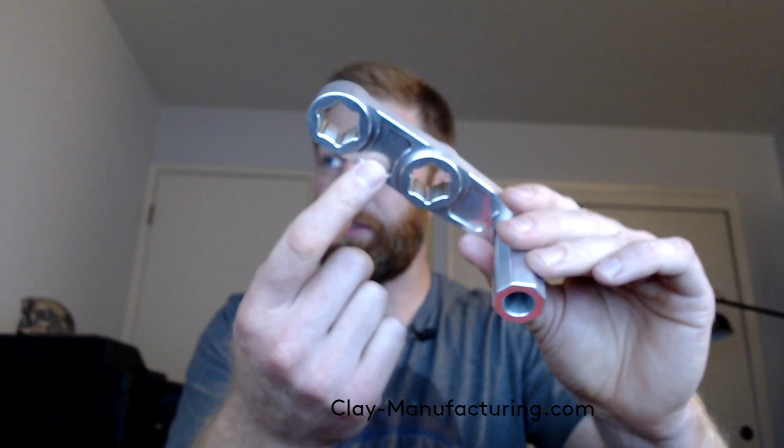And so this is my old version right here. And then this is kind of the newer version right here. And we do some finished detail work in here. We do some blending. So I'm going to open this up.

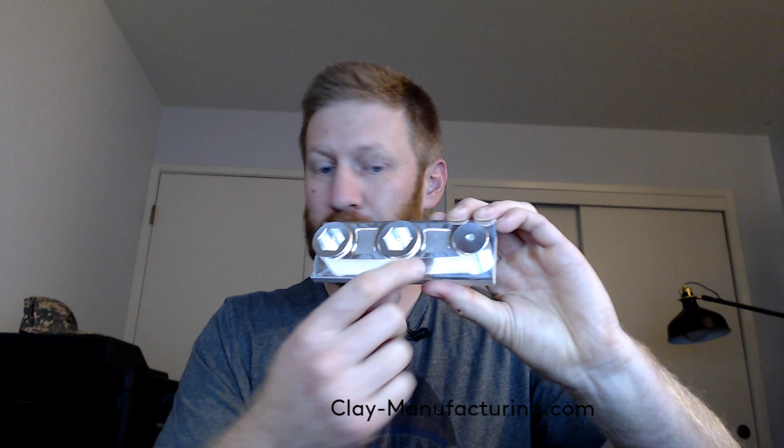I'm recovering from a cold, so I don't know how this is going to go. My throat is already hurting.

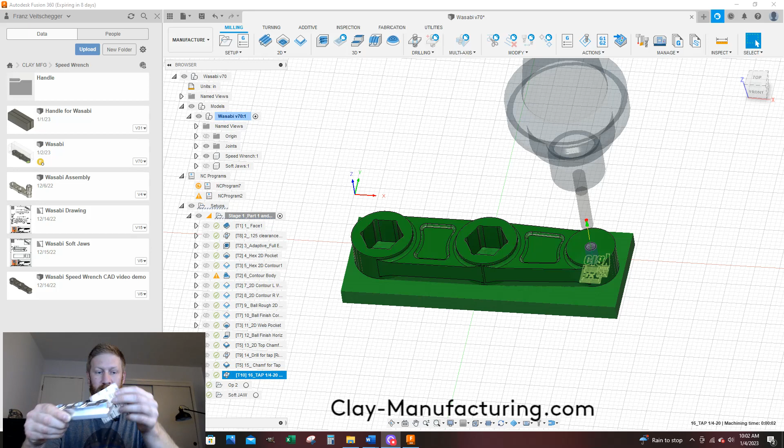But our learning objectives for this are 3D adaptive roughing. So we're going to utilize 3D adaptive roughing. We're going to do finished contouring, so our finished strategy to clean the outside of this puppy up and some of these kind of stands. We're going to do how to actually go inside a pocket and our feeds and speeds for doing a tight pocket with a relatively big end mill without doing a pre-drill in the center.

We're going to do rigid tapping. So if your machine does not have rigid tapping, you're just going to have to drill a hole and then tap it by hand. And blending perpendicular surfaces. So let's see.

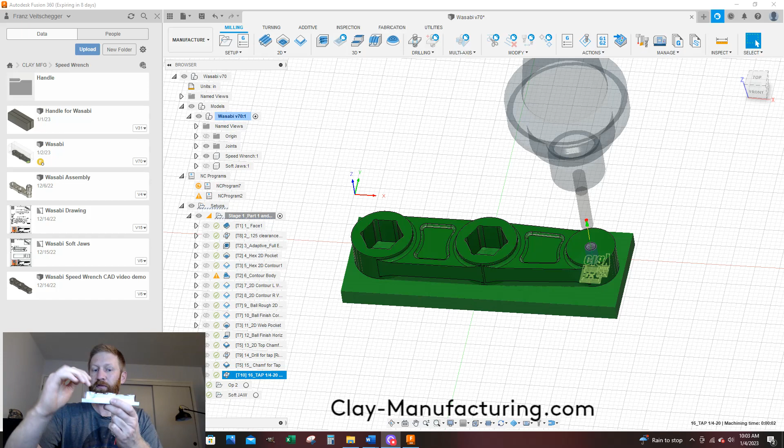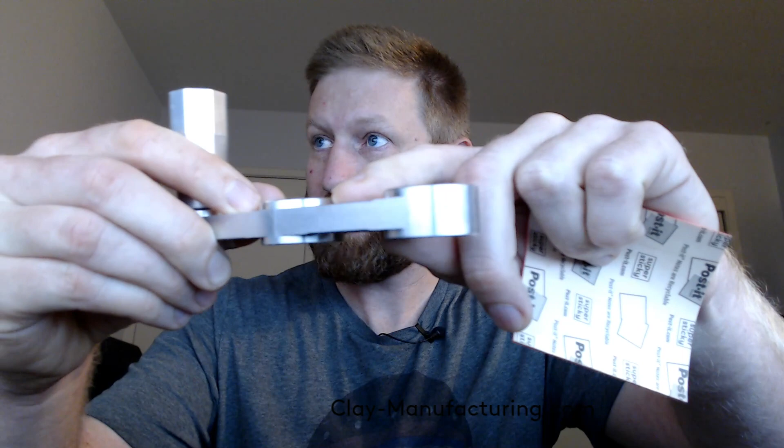On my old version, I used a square end mill for cutting in these details around these stands, so it's just like a 90-degree transition, and a lot of gunk gets stuck in there. Same with the bottom of these pockets. It's just a 90-degree end mill. Now you could use a radius end mill or a bullnose end mill to do that, but because we have limited tool holding capacity in my machine, I'm going to utilize an 1/8" ball end mill to blend these

transitions. It's kind of cruddy here, you can't see that well, but we're going to go over how to do that. We're going to go over how to do some detail in here with our 1/8" ball end mill to make it look pretty. And then this edge right here is also blended with that 1/8" ball, so it's a nice smooth radius, so gunk hopefully won't get stuck in there as easy.

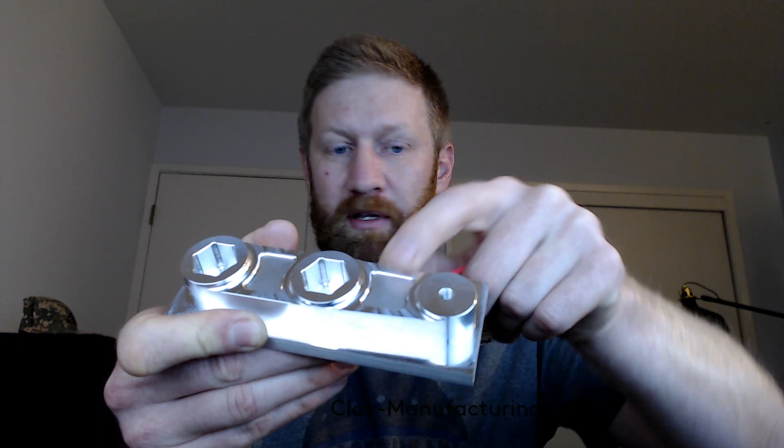And then we're going to do some 3D horizontal finish work on this top web, is what I call it. And that's about it. Let's get to it. I'm going to try not to make this video more than 30 minutes. So if it approaches that 30-minute mark, then I will change Op 1 into 2 different videos. So it'll be Op 1 Part 1 and Op 1 Part 2. But we'll see how it goes.

Let's close this out. I've got my water to help get my throat through it a little bit longer. Let's see. Did I like that? Keeps it kind of smushed over there. All right, let's get to it.

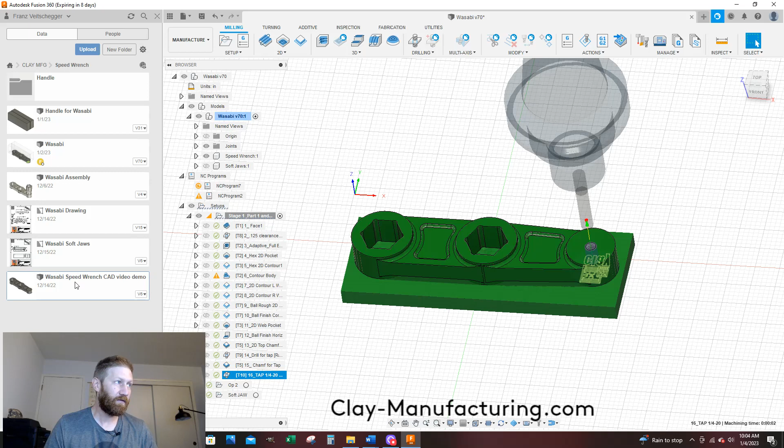So the first thing, let's go to where we left off. This is our end goal. We left off here, which is our 3D CAD. So this is where you should be. So what I'm going to do for my purposes, I'm just going to go File, Save As, and I'm going to change this to CAM Op 1 Video Demo. And I'm just saving it over here. You can save it however you want.

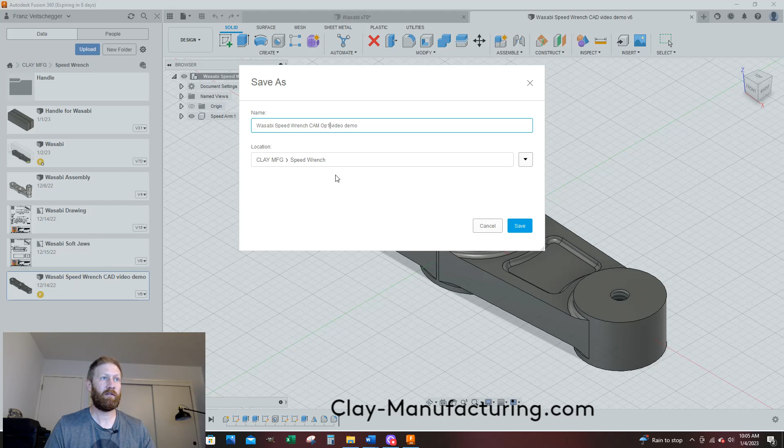And I have my new version, and here we go. So this is going to be my Op 1. Now the next thing I need to do, I need to go to my Manufacture environment. So I'm going to come up here to the upper left and go from Design to Manufacture. All right, we're in here.

Now I need to specify what my stock is. That's the raw stock. So this one's been cut, of course, but I need to tell it what this length is in X, what the width is in Y, and what my thickness is in Z. And I mean, you want to try to get it pretty close. So if your saw is not accurate, I would cut your stock first and then measure your stock with calipers or tape measure.

You can get pretty close with a tape measure. And this one measures about 5.625. I'm going to say 5 point... yeah, so it's about 5 5/8. I'm just measuring the length. All right, I'm going so slow.

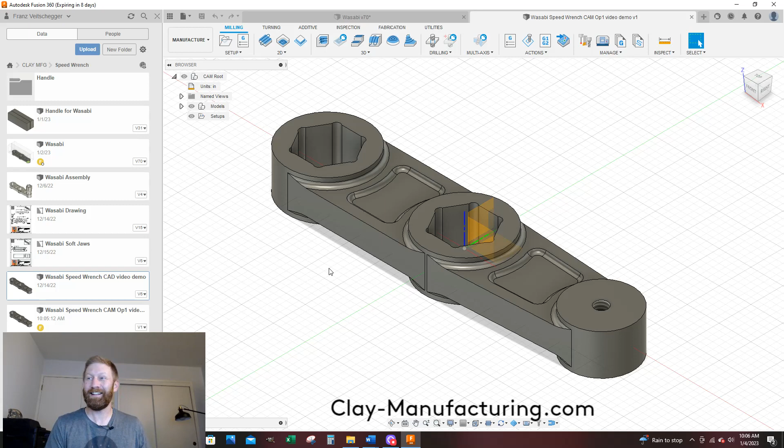We'll go setup, and I'll say new setup. And the first thing I'm going to do, I was just wasting so much time, I'm going to go to stock. And for mode, I don't want relative, I want fixed, because I know what size I'm starting with. So I'll go fixed size box.

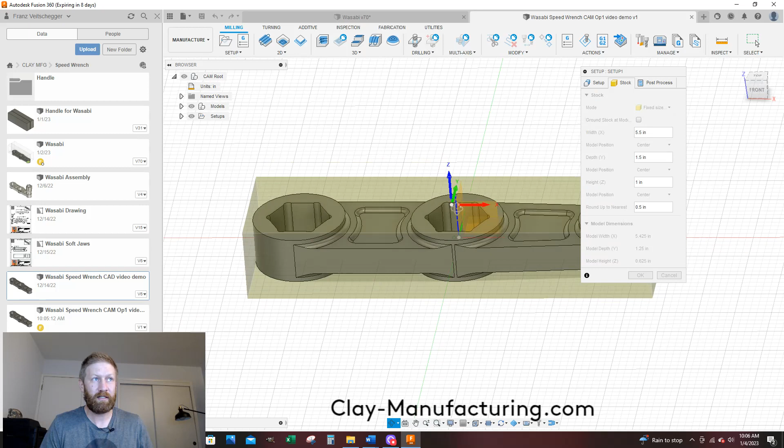Now WCS is going the correct direction. So I have X going to the right, Y going away from me, and Z going up. So now when I populate these parameters, it will get bigger or smaller in the dimensions I want it to. If not, you need to get your orientation of your work coordinate system set up first, so that when you populate these numbers, it's going in the right direction that you want it to in the machine.

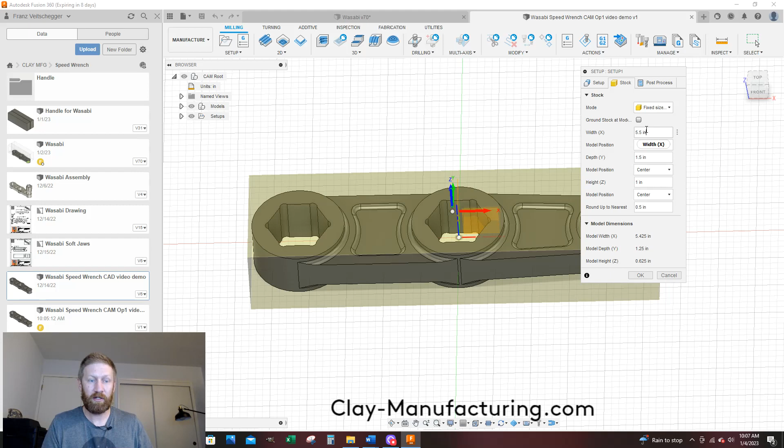So since my work coordinate system arrows are going the correct directions, I'm just going to populate this. My X dimension is 5 5/8, which is 5.625. And then I'm going to leave that in the center. My depth, I'm starting with 1x2 stock. So this is dependent on me starting with 1x2 stock. It is not the most cost effective, but I use it for soft jaws on a whole lot of other parts. So that's why I'm doing it. 2 inches. And then my height is 1.

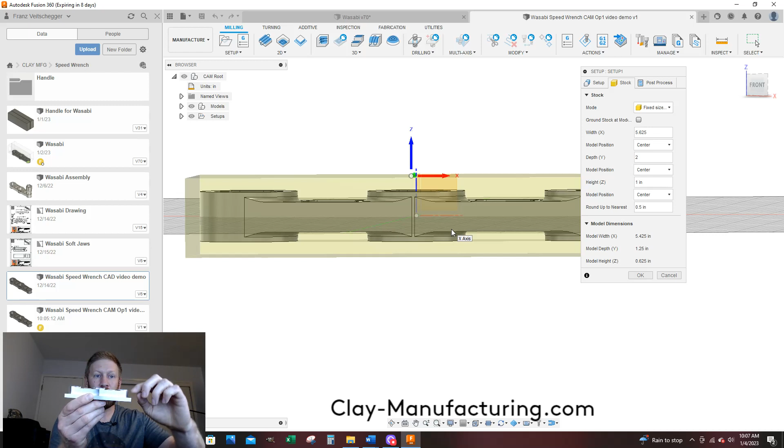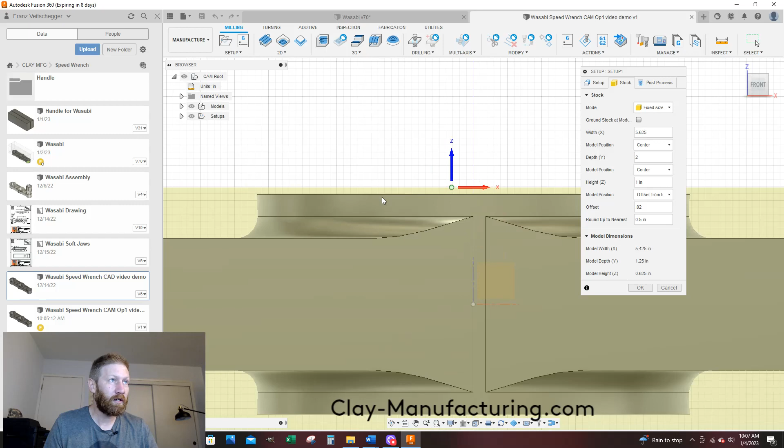Now, the thing we want to be careful of is I want my model to be at the top of the stock, but with a 20 thou offset, because we're going to machine that off. And Fusion updates it where the part is in the center of the stock. So I'll go offset from top positive, and then it defaults to trying to keep it in the middle. And I'm going to say, nope, 0.02. And now you see, when I look at it from the side, there's a 20 thou amount of material that we're going to cut off with a face mill.

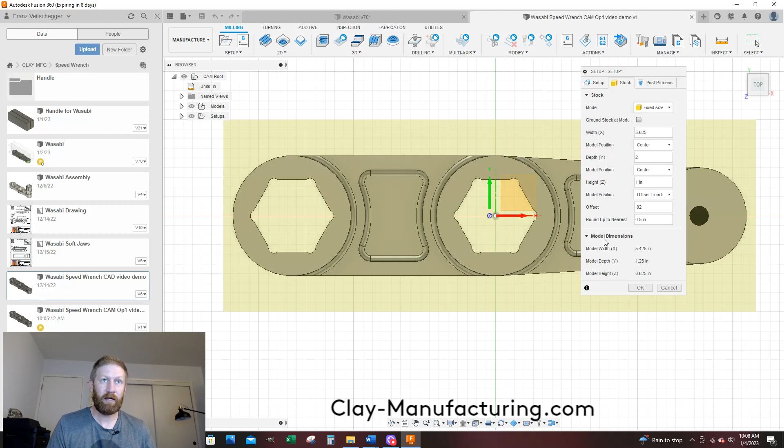So my stock is looking good, and just do like a top view. Kind of look at it, make sure your model is in here. And if you're using a crappy saw, if it's not cutting perpendicular, you might want to cut a longer piece of stock to ensure that when you do your roughing and finishing, you're cleaning up both ends so there's no saw cuts visible. Everything looks good.

Oh, or does it? Now we've got to tell it, where do I want my work coordinate system? How am I going to touch off my work? So I want to move this to this back left corner, because it's pretty common that you'll use a back left corner for your work coordinate system. So you'll pick up the X, Y, and Z will be the top of the part.

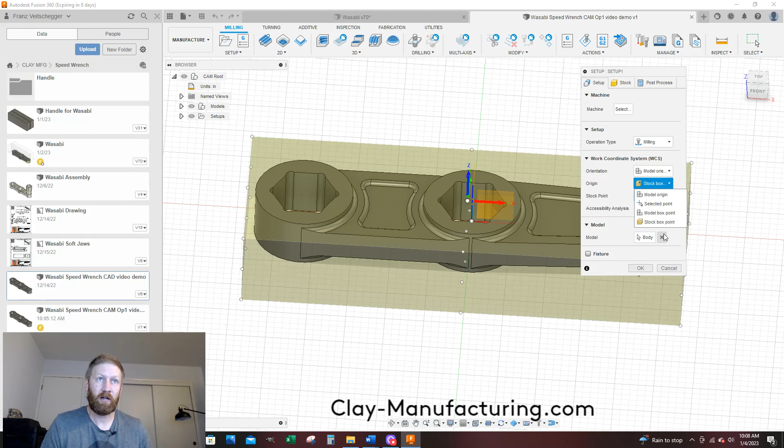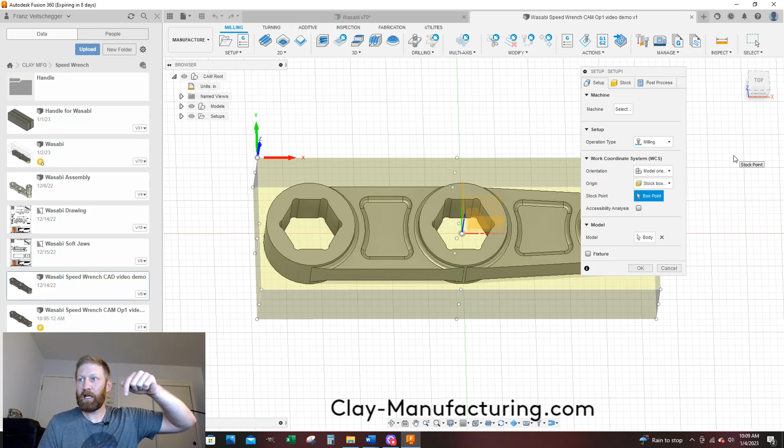Let's go setup, and this is for stock box point. So it's based off the stock, which is what we want. And then for the box point, with this highlighted, I'll just come over here and click that. And you can double check yourself. That looks good. X is going right positive, Y is going positive away, and Z is positive up. Everything looks killer. And look at your view cube too. Everything's looking similar to mine, and it's a 3-axis milling machine, so I like to model all my detail from the top, and I'll say okay.

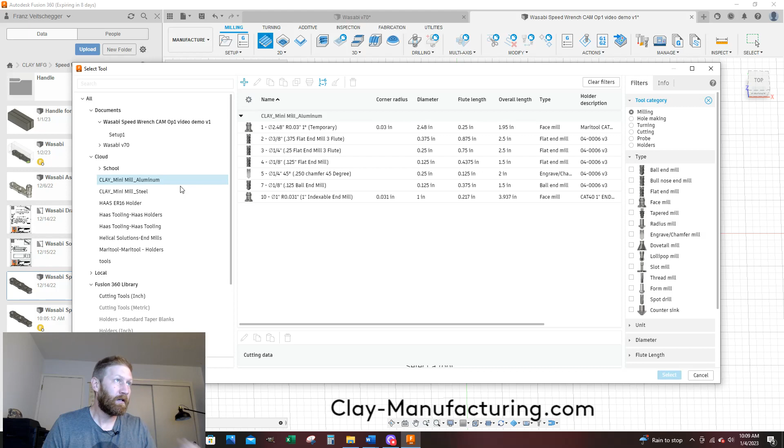There's our setup. The next one I'm going to do is a face tool path, and that's in the 2D face. And I'm going to go to my mini mill aluminum, and I have tool 1. It's almost a 2.5-inch face mill. Select. And for me, my default feeds and speeds are going to work well. 6,000. Everything I put in here, I have machined, and it works great on a Haas mini mill. If you've got a smaller machine, you might have to detune it. If you've got a bigger machine, you might be able to get more aggressive with it.

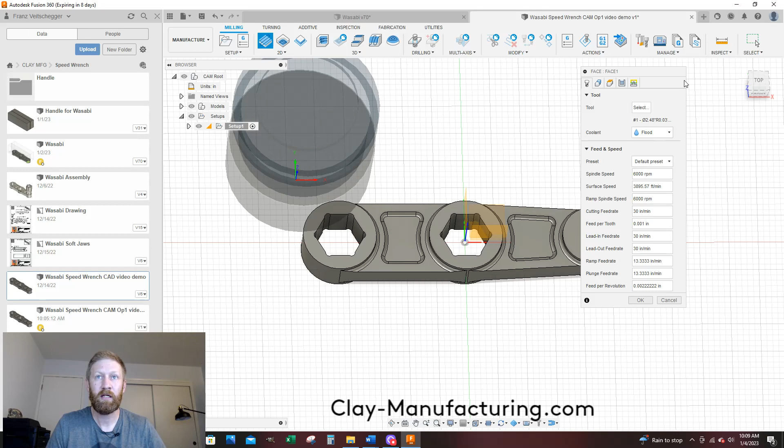So this looks good. Let's go to our geometry. I'm not going to select anything in here. The defaults are good. For my heights, I don't have to do anything, because it says my bottom height is my model's top. Looking good. Passes tab, what I am going to do, so I don't do 2 step overs, I want 1 clean pass.

I'm going to change the step over to 2.3. And let's go to my linking tab. I'm not going to do anything. And let's just see how it looks.

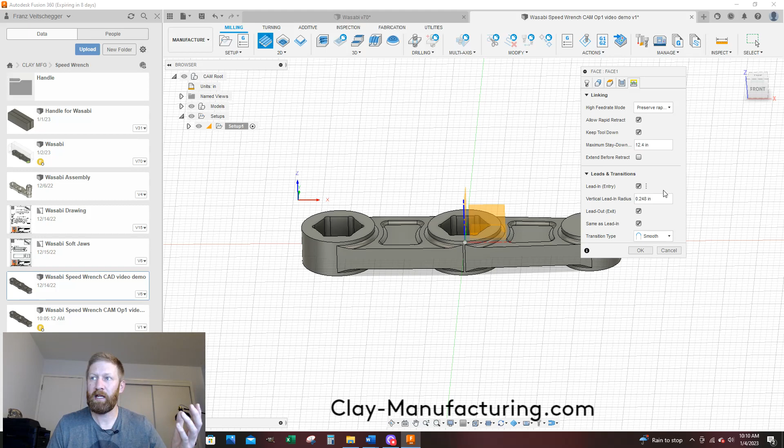You know, John Saunders, in one of the videos, he does as little as possible and then kind of goes in and edits it. It was a lathe video I was watching, but I like that strategy. Just do the basics, make sure you get a tool path working before you screw with everything, and then fine tune it.

So that's looking good. And I'm just going to go save, so I can save my work in case I lose internet connection, or my computer crashes, or my power goes out, because we're in California, so our power loves to go out all the time.

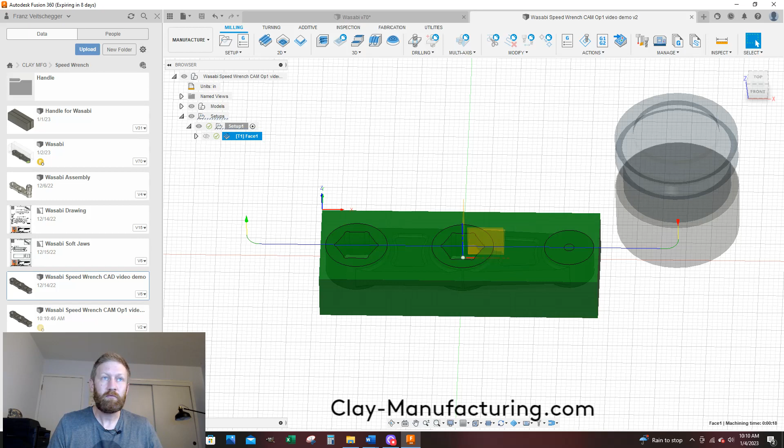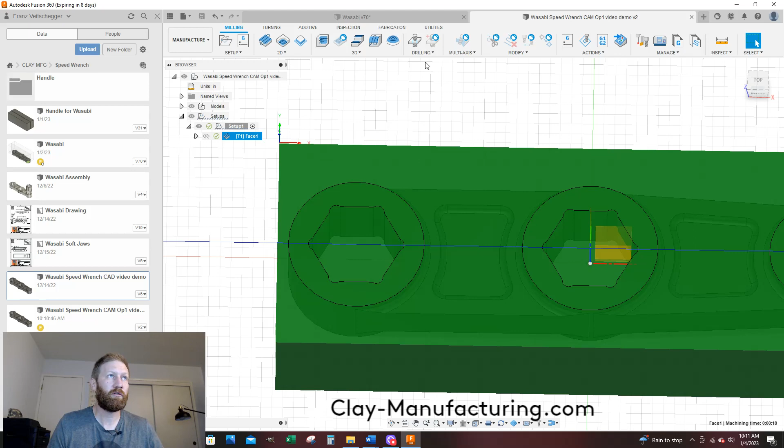Now the next one I want to do is, I cleaned up the top. Now while I have supporting material on the inside and the outside, I'm going to pop these holes in here, and those are just clearance holes, because this is to fit around a hex handle. So the way I easily do it on a mill is I just clearance them with those holes. So we're going to go drilling. And we'll go to my tool library.

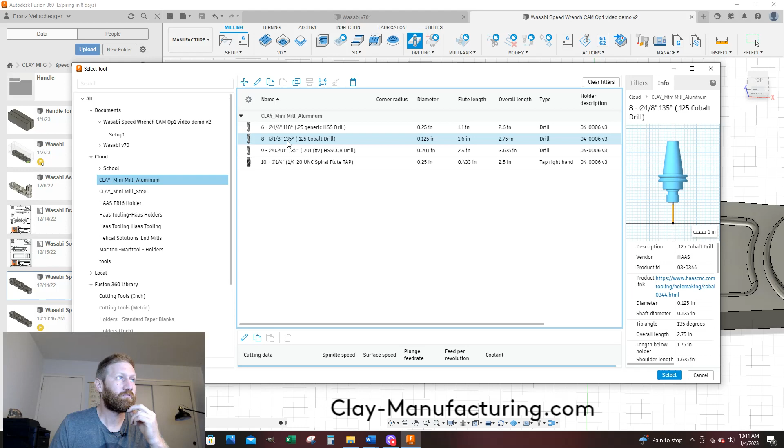But I have an 1/8 inch cobalt drill. The one I'm using is actually a high-speed drill, but this will work. So it's my T8 1/8 inch drill. I'm going to say select. And for me, these parameters work well. I look up what's recommended feed per rev by the manufacturer, and I kind of detune it because I'm just on a mini mill and I'm trying to go nice and easy.

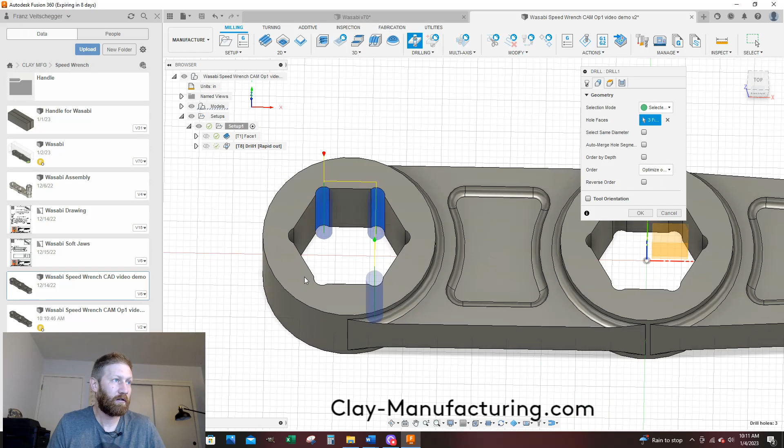Geometry, now I need to select all these holes, and I can select through the part, as you see. Come on, baby. Oh, so I got 11. Oh, I missed one. You see that? Come on, guys. Why didn't you tell me that? All right, now I have 12 faces, and I'm just selecting those.

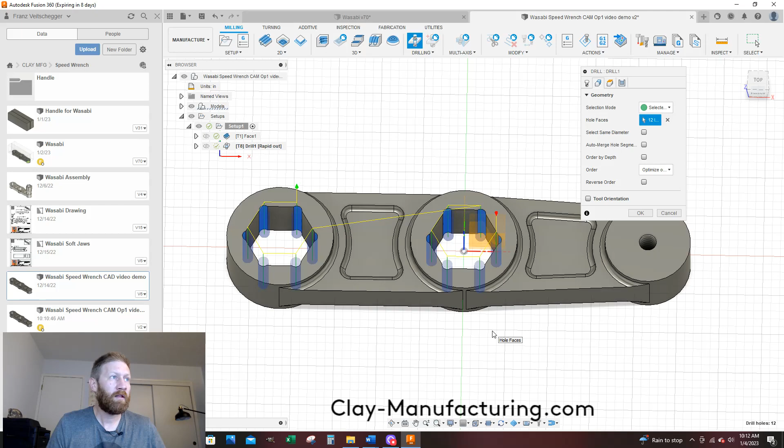We're going to go to our heights tab. It defaults to where the tip of the drill just goes to my model bottom, but I want those holes to go all the way through. So for bottom height, I'll go drill tip through bottom. And if you do that, oftentimes there'll be a real heavy burr. So I'm going to poke through just a little bit more.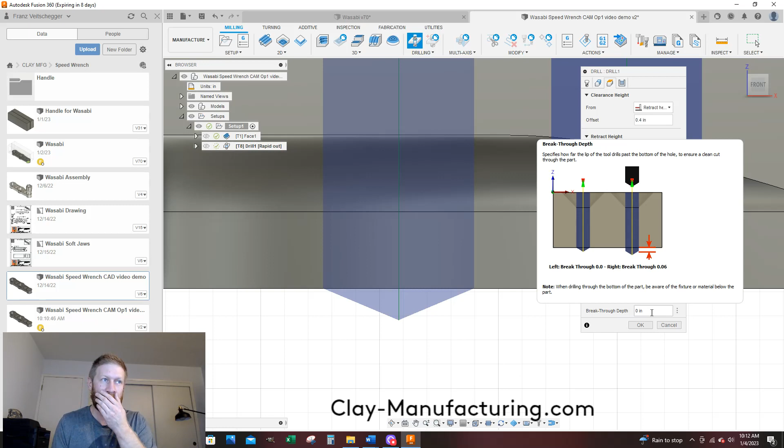So my drill through depth, or when I flip it over, if I don't hit my nominal size of 625, if it's a little bit thicker, I want to ensure that it's removed. So I'll say breakthrough depth of 10 thou. And you see how that straight edge goes 10 thou past the bottom. Love it. Now I'm going to go to my cycle tab.

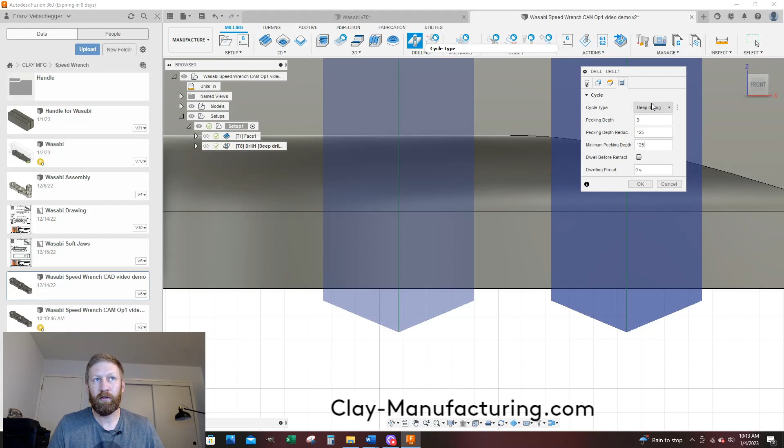I want to go drilling, and I'm going to do deep drilling full retract. And I'll do pecking depth. The first one will be 0.3. Then I'm going to reduce it by 0.125, and then my minimum pecking. So each time it pecks, it'll reduce by 0.125, and when it gets to a minimum of 0.125, it'll be 0.125 after that. You can hover over these and get a better explanation. I just don't have the time in these short videos.

Okay, we're 12 minutes in and I'm on my second toolpath. I'm probably going to have to do 2 videos.

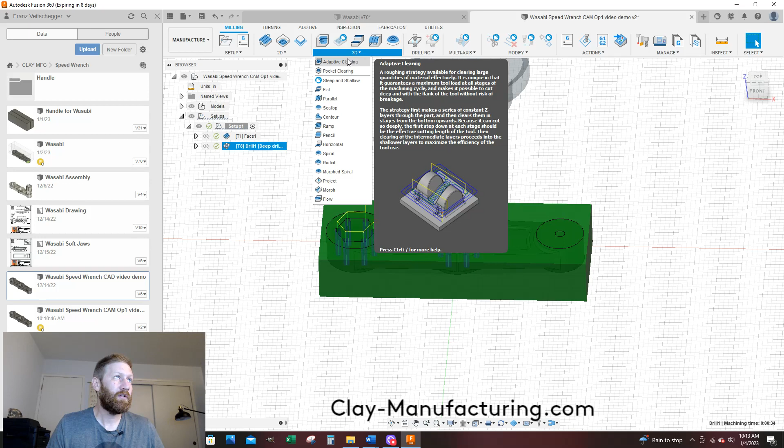Next one, we are going to rough out this whole body. I want to just adaptive rough this whole thing out. We want to do 3D, adaptive clearing. So 3D adaptive clearing, click. And I'm going to use my 3/8 flat end mill. I'm going to go select. And for me, on my clay stuff, that's my tool 2. Select.

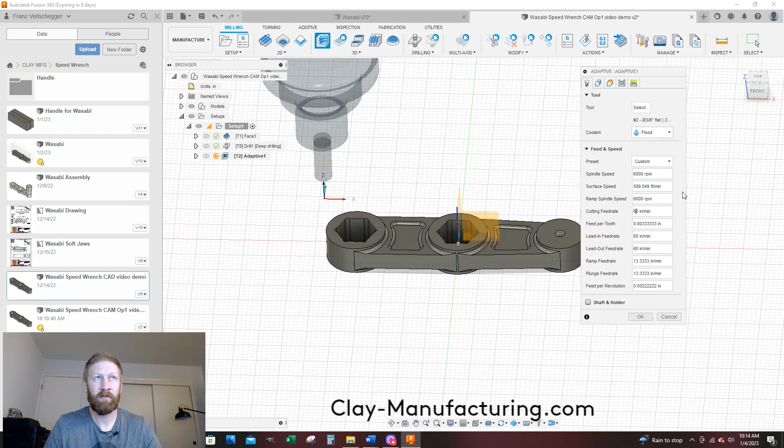Now, I default to pretty slow linear feed rate. We are going to bump this baby up to 60 inches a minute. So cutting feed 60. We're going to leave these defaults, and my spindle maxes out at 6,000, so I'm leaving it at 6,000. We're going to go to geometry. I'm not going to do anything, but I am going to deselect my rest machining.

Let's go to my heights tab. We got to do my trick. So for bottom height, it goes to model bottom, which is right here. And that number is based off the stock. It's referencing the stock because my part thickness is 625 plus another 20 thou is 645.

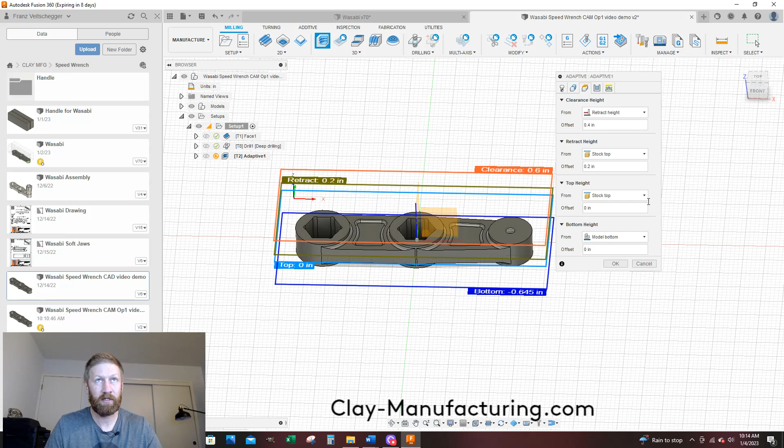Let's do this. And if I look, it stops right there, but I want to shoot past the bottom to ensure when I flip it over, it gets cleaned up. So I'm going to go 20 thou past. I'm going to go minus 0.02.

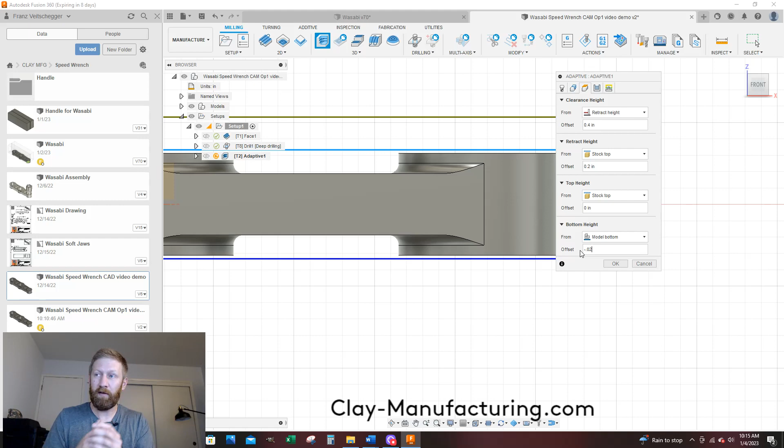And these heights are based on 1-inch thick stock using your standard Kurt vise with the standard hard jaws that come on a Kurt vise, using 1.625 tall parallel. So that's 1 5/8 parallel. It's typically the tallest parallel set in a common parallel kit, and they're 1/8 inch wide parallel. So all this will work considering that setup is the same. If your setup is different, you need to verify your heights and just verify everything, really.

Passes tab. Let's see, stock to leave, I'm going to reduce this to a much smaller number, say 0.005, and the axial will update to 0.005, and then I need to also come up here. So my max roughing step down, I'm going to say 0.7. Fine step down, I'm going to increase this number to 0.125. Flat area detection, I'm going to remove that. And I have notes, so I'm just verifying my notes so I don't have to do this 4 million times. Oh, optimal load.

My default optimal load is 0.05 times the cutter diameter, but I'm going to do 0.1, 10% times the diameter, and it's going to be 0.0375. So optimal load is like your width of cut. It's kind of like the step over that it tries to maintain during this adaptive roughing strategy, which is to remove material as fast as possible. So I have my optimal load, boom, minimum cutting radius, okay, direction, 0.7. I'm just going through here, giving you time to catch up, slackers.

Stock, good. And then I like to do smoothing. I kind of default that on every toolpath. For this, I don't need to do feed optimization. And let's go to linking. I'm looking at my notes, just running down my numbers, seeing what I did or didn't change.

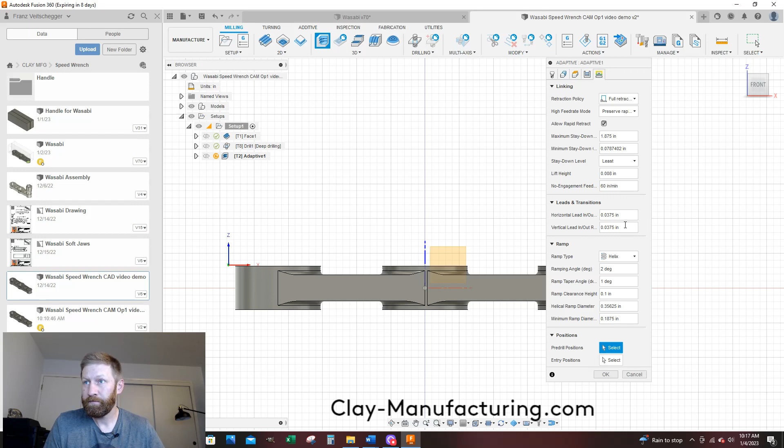And what you could do, you could select the entry position. On my setup in my machine, this would be like the front right corner. So if it doesn't automatically put your toolpath starting here, I recommend selecting an entry position. That way when the tool is approaching, you can watch it better versus when it's behind the part. And with the new Haas machines, they have the door locks and everything, so it's really hard to see what's going on behind the part. So I recommend trying to start your toolpaths where you can see them.

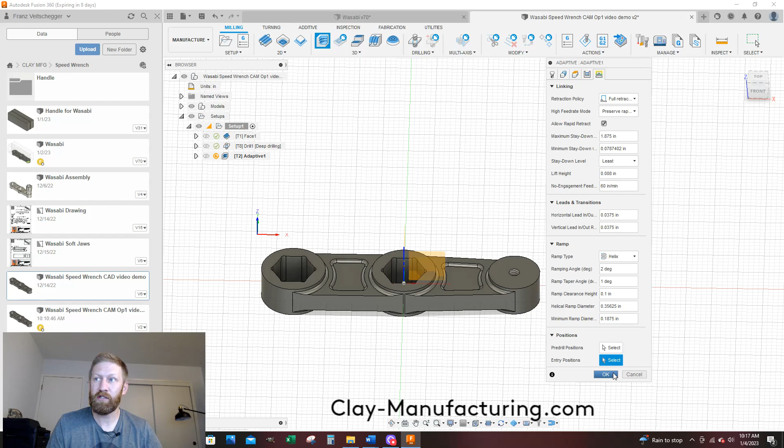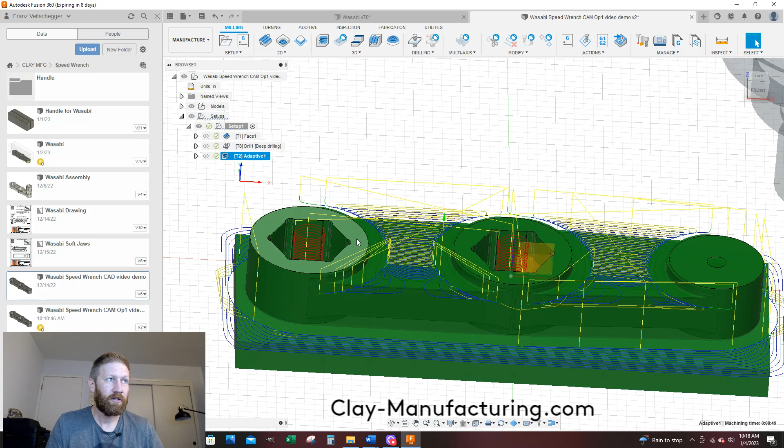I'm going to say okay and just see where the default is. And look, this red arrow right here, that's where it's going to plunge down. So I like it. And this green one going up is where the tool is going to retract between tool changes. So I like that. It's my front right corner, and this roughs out the whole part. If it's cutting up here, it means you did not deselect the flat area detection. We already faced that, so it's finished and pretty. We don't need to cut it again.

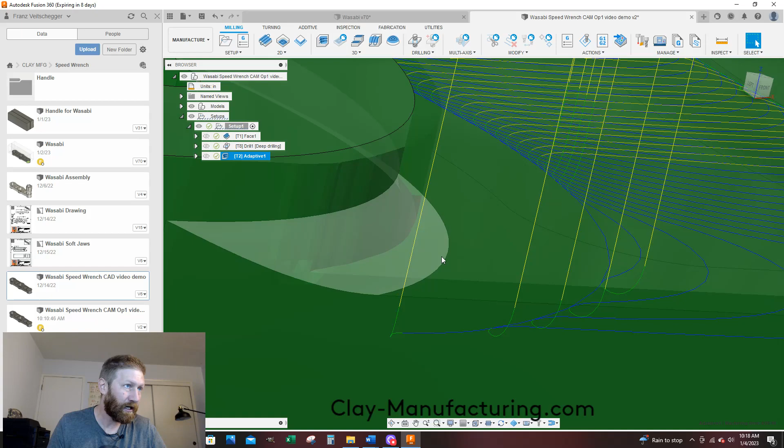We want to leave a little bit of material on here so we can come back and clean it up with a horizontal. And then we have material here on this wall that we're going to clean up with our ball end mill. And you see how it kind of cuts over here? So that's all looking fine. And we're going to save our work so we don't lose anything. And this is looking great.

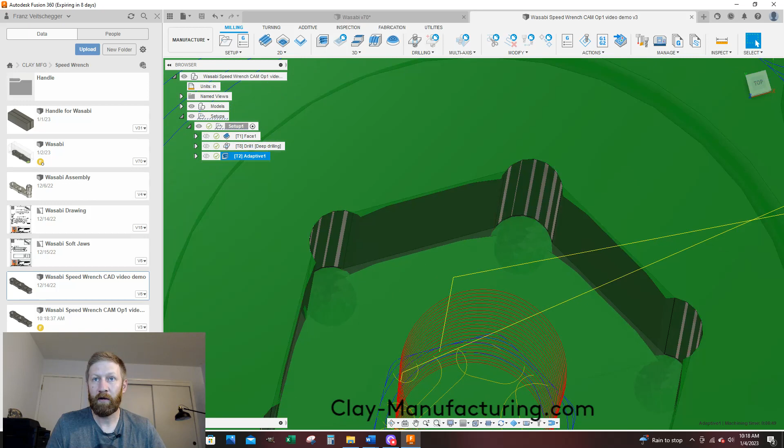Now, if these lines look too spread apart, it means you didn't look at your optimal load, and that's really important, because if you go at 60 inches a minute and do like a huge 0.2 optimal load, you're probably going to break an end mill. That's looking killer. So let's go. The next one, we're going to cut out these pockets. So you see this one, how it, shoot, let me check something.

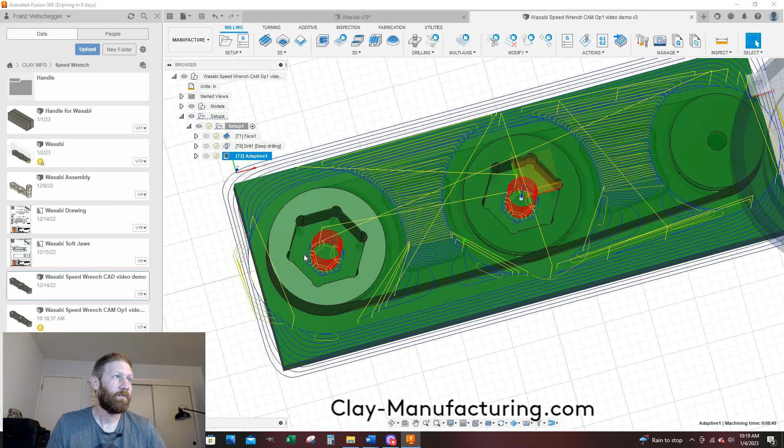Oh no. He did bad. All right, I'm going to do some editing. So on this one, on the adaptive, I didn't let it cut in here. So I think I know what I need to find. You see, it's cutting in here. I did a whole entire, because I don't want to go 60 inches a minute in here, because that's going to be way too fast. So I created another toolpath to do that.

So I don't want it to cut in here. So I'm going to right click on here. I'm going to say edit. Let's go to linking. I'm sure I overlooked something here. Or let's go to passes. So now I'm going to click on passes. Ooh, this is it. This is what I missed here because I'm a dingus. Machine cavities. I want to get rid of that.

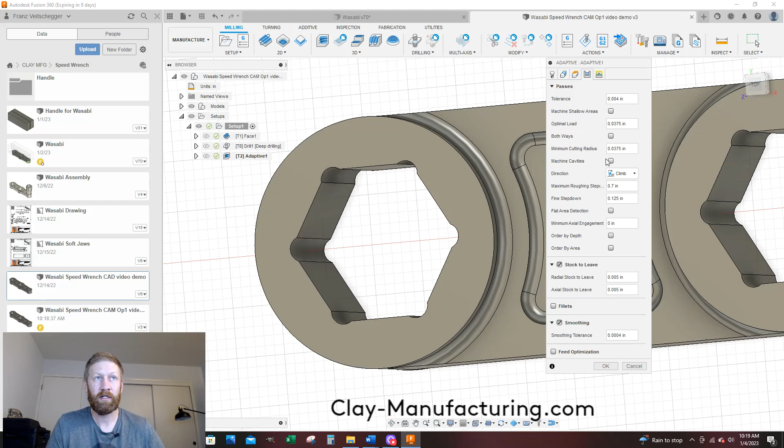So I did a right click, edit. I'm on my passes tab and I want to deselect this. So I'm going to click on it and now it is not selected anymore. And I'm going to say okay. Oh, that was the money maker. So now it didn't clean those up.

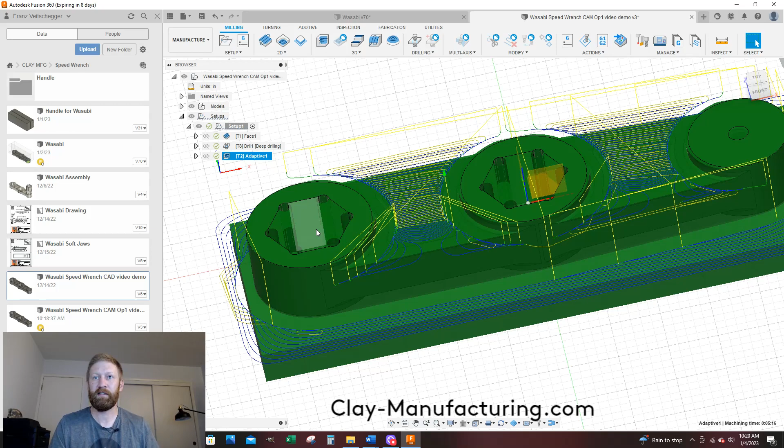And the reason I'm doing a separate toolpath is because this one's at 60. I'm just trying to rough it. I cannot rough at 60 inches a minute in here. It's too fast for that small area. It'll break my end mill or give me excessive chatter. So I'm going to do another pocket, but it's going to be a 2D pocket. And let's say save so I don't lose any data.

We're getting to about 20 minutes. So I still got 10 more minutes. We're going to see how many toolpaths we can knock out within 30 minutes total. Let's go 2D. We'll say 2D pocket. I'm going to do my 3/8 flat. I'm going to leave 6,000 RPM. We're going to go real slow.

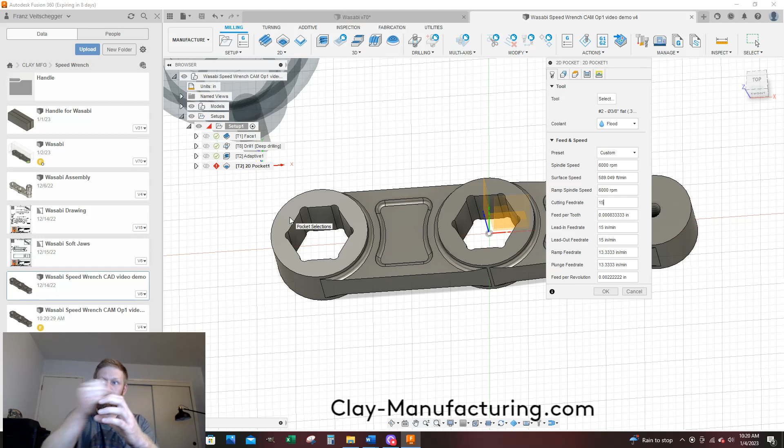We're going to go 15 inches a minute because that's linear feed rate of the center of the tool. And when it's whipping around these corners, the surface speed of that tool is going extremely fast because it's a real small area. So 15 inches a minute is actually pretty quick in our situation. So cutting feed is 15, lead in, lead out 15. I'm going to leave that, and that's going to work great for my setup.

And this is very, very slow. Usually I don't go much over 3 thou, and this is even under it. This is 8/10, and it's because my feed rate is so small. It's dependent on your RPM and linear feed rate. Most times in aluminum, I'll just max out my RPM and then adjust my linear feed rate to get the appropriate feed per tooth. I don't want to keep this video going, so there's just some sprinkled in advice. Now let's go to geometry.

Oh, I lost internet. This is why we save all the time, people. So let's see how I'm going to go about this. Okay, let's look at my internet. Yes, it's Big Daddy. And I'm going to say connect. There we go. I think we're connected. This is why you save all the time. If you're not connected to the internet and you save, it will not save, at least in my experience.

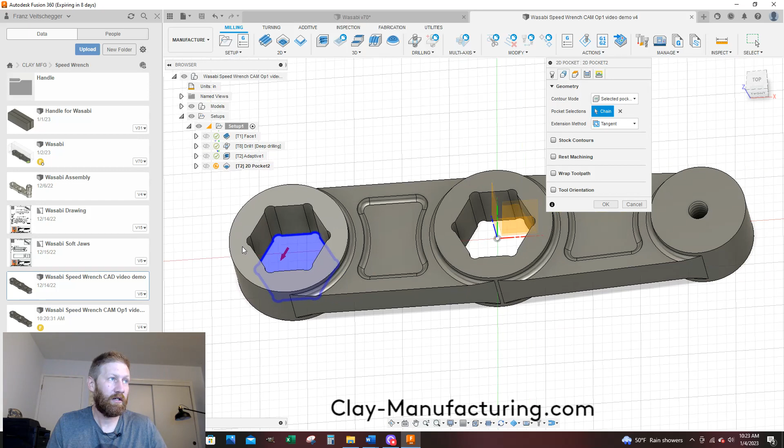Now I'm going to go to the Heights tab, and you know my secret sauce. All these are pretty good, but bottom height is that selected contour, and for here I'm just going to go 10 thou past the bottom, negative 0.01. You can look from the side too to verify.

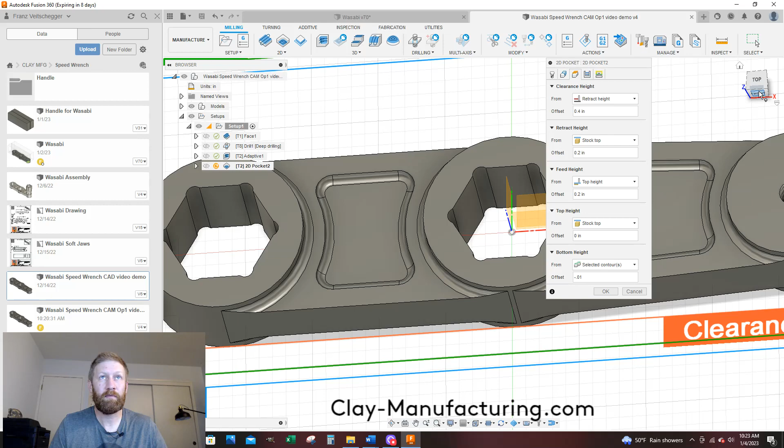Well, it's not showing now. We'll look at the toolpath later. Everything's trying to be difficult right now. All right, passes tab.

We're going to change stock to leave to 10 thou on the radial, that's on the side of the tool. So on the side walls we're going to leave 10 thou, 0.01. Under the tool on the bottom, I don't care about that surface finish because it's going to get milled away, so I'm going to go 0.0.

And I'm going to do smoothing. I'm also going to do feed optimization, and I'm going to leave these defaults. Oh, actually I lied, I'm going to change this radius to 0.125.

So this is saying when the radius is 0.125 or under, it will default to a linear feed rate of 3.75 inches a minute. So in the really tight corners where there's a lot of load on that tool, where it's likely to get chatter or break, it's going to slow it down even more. Then it'll speed back up to that initial 15 inches a minute on the straight, non-radius, or radius over 0.125 inches a minute. Okay.

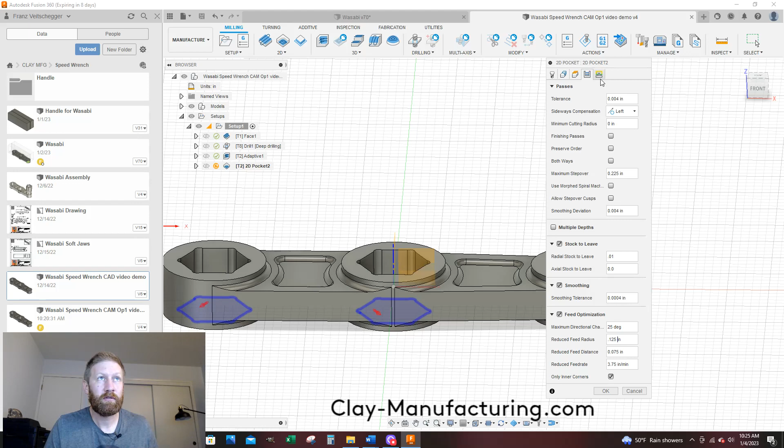And I'm just looking at my notes. We're going to go to linking. We might have to do some modifications here.

So typically it's more efficient if you are able to plunge with a drill. Like if I'm using a 3/8 end mill, I could plunge with like a 1/2 inch drill, right in the center of these hexes. Then with a 3/8 end mill or 1/2 inch end mill, I could plunge in that drill hole and then immediately get to do an adaptive.

But depending on your tooling, depending on what tooling you actually have loaded in your machine, you might consider doing a tool change. Is it faster to pre-drill and then come back and chase it with and open it up, using a tool change in between, or is it quicker to just helix down with an end mill and then start doing your adaptive rough? Those are decisions you're gonna have to figure out.

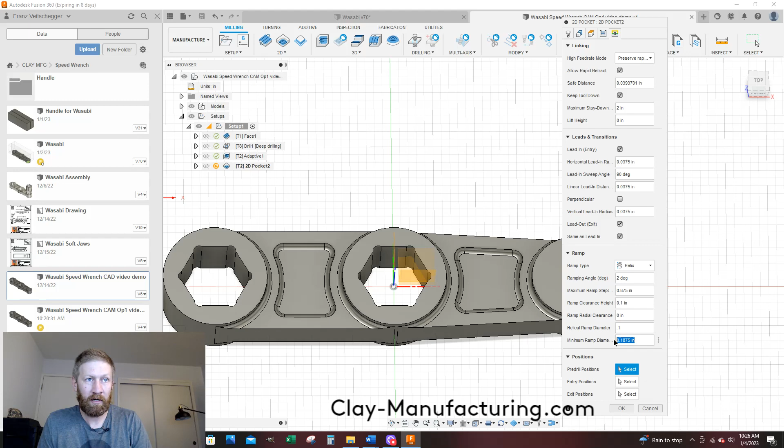For me in this situation, we're gonna helix in with an end mill because I don't have a 1/2 inch drill because I'm a poor man. And then what I have to do, because it defaults to this big helical ramp diameter, it won't allow the tool to helix and go in, so we have to reduce that number. I'm going to say 0.1, and minimum ramp diameter, I'm going to say 0.1, and I'll show you what I'm changing. I'm going to say okay.

So this is that helix that we just did. And I just realized I forgot to do something. Yeah, I need to change my step over. But this is what we adjusted because it defaulted too big to actually go in there.

And so let's go on here. I'm going to right click another time, say edit, and let's go to the passes tab. This is what I want to change: my maximum step over, it defaulted to that large number. We want to reduce it to 10% of our tool, so in this case it's 0.0375, that's just 0.1 times my cutting tool diameter.

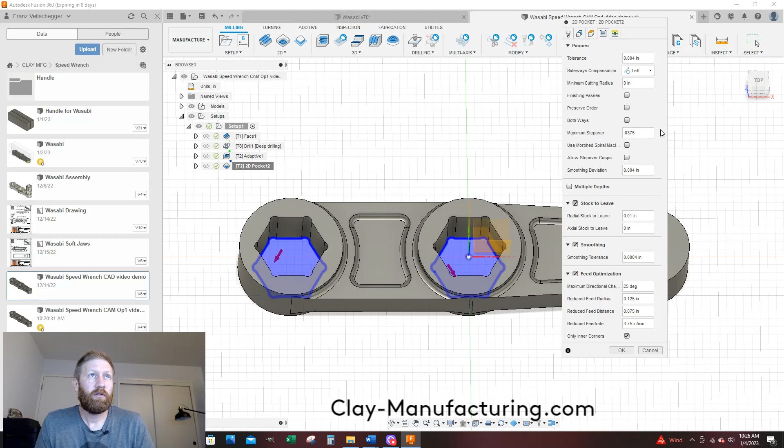Now let's look at it. There we go. So it's going to helix in, and then it's going to do about 38 thou step overs. These yellow lines are where the feed optimization is enabled, and that green is kind of going from this toolpath to that toolpath.

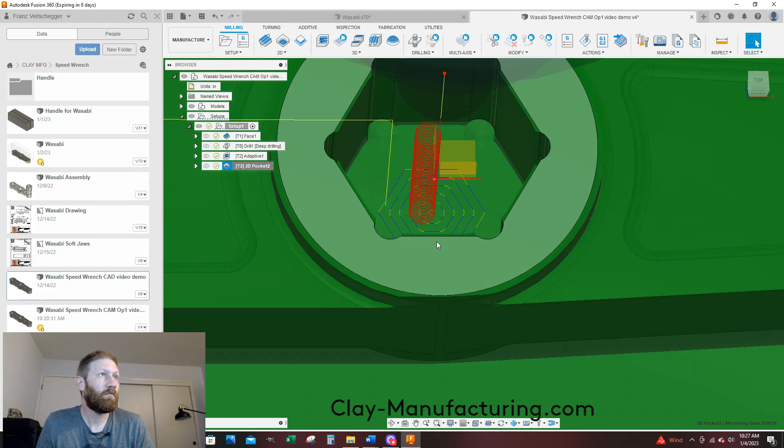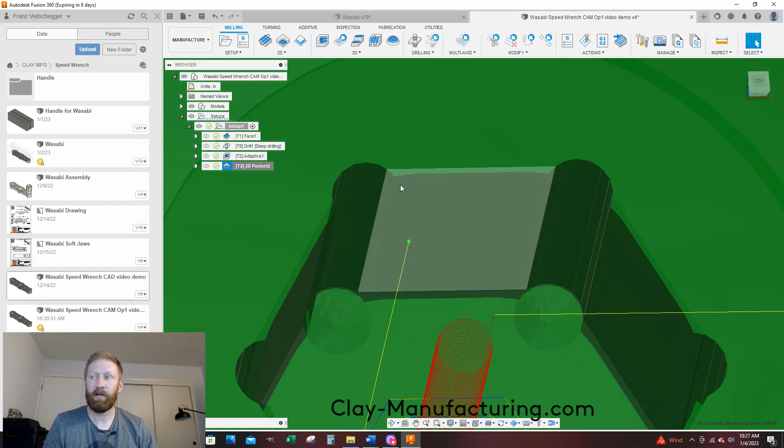And I like what I see. If you notice, this is the leftover material, and you see how it's got this kind of little ramp on the end, or almost a cusp where it gets thicker. It's because the diameter of the tool only allows it to remove so much material. So when we clean it up, we're gonna use a 1/4 inch end mill to make sure it doesn't leave a little scallop type deal on the end. And I'm gonna save.

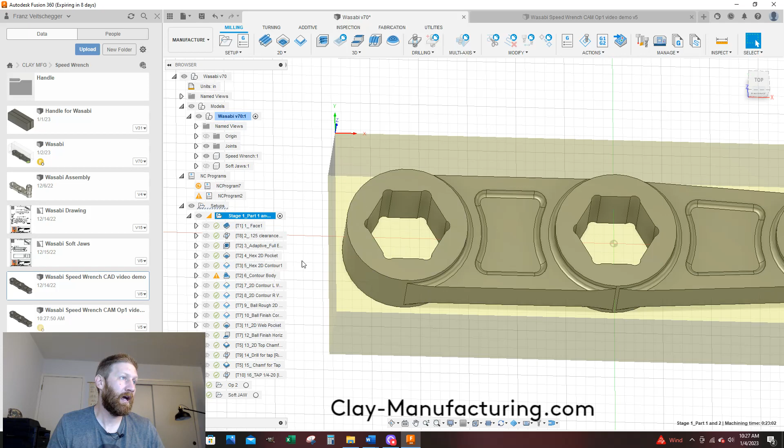So the next one, we're gonna clean that up while we're down here. We're at 26 minutes, great. Don't yell at me, I'm just looking at my other one to verify. Yep, that looks good. And I'm verifying with this because I've cut it. I know you're not gonna crash if you're using all my same tooling and machine setup.

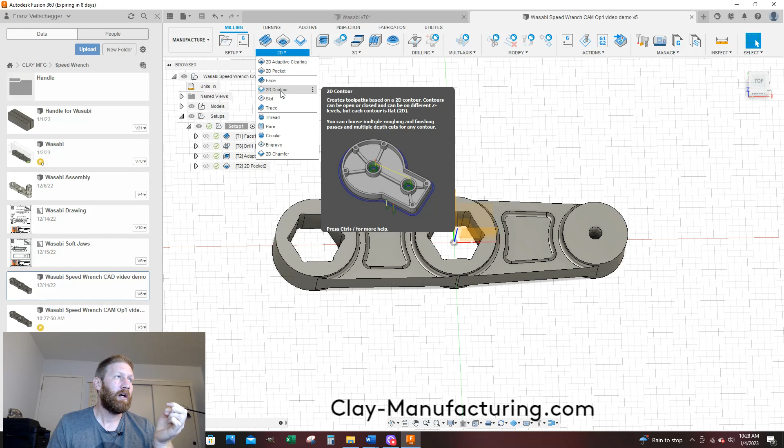That looks good. Let's do a 2D contour. Now this is a cleanup strategy where we'll go 2D contour. Side note before I start actually doing this is, on a finishing toolpath in Fusion, compensation type, this is where you could change this to wear.

So if you're trying to slowly increase the diameter of a feature on the radial of the tool, on the side of the tool, if you enable wear, then on a Haas control, when you do radius or diameter wear, however you have it set up on your control, you can add or subtract values on there to compensate your cutter comp. You can cut bigger or less using the control. I'm sorry if I'm sounding like an idiot right now, but it's hard to explain without the machine and showing. However, your adaptive toolpaths don't have this, but your finishing toolpaths have this, and it's a very powerful tool.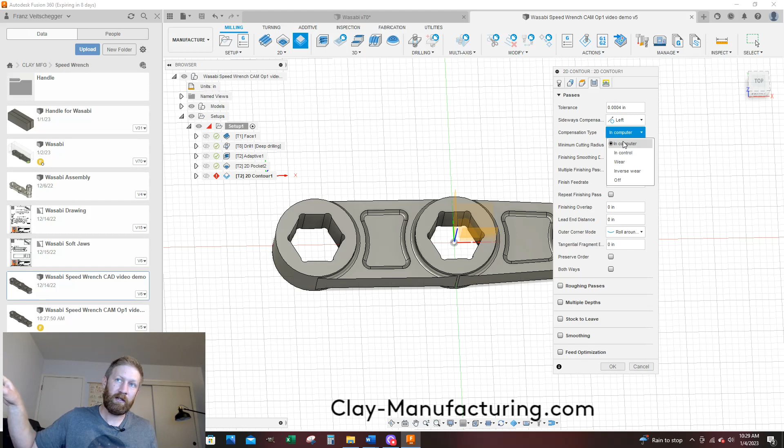In machining, on critical dimensions, a lot of times you'll back the tool out or whatever, whether you add or subtract, and then you'll creep on those dimensions by playing with your radial wear. So whether you're making it cut more or less, this is where you would enable wear. I'm not going to do it. So if you leave it at the default, you can't do radial or diameter wear at the control. It won't allow you. You can do height wear, but not radial wear. All right, back to our tool selection. Sorry for that tangent, but it's very important later down the road when you get more confident machining.

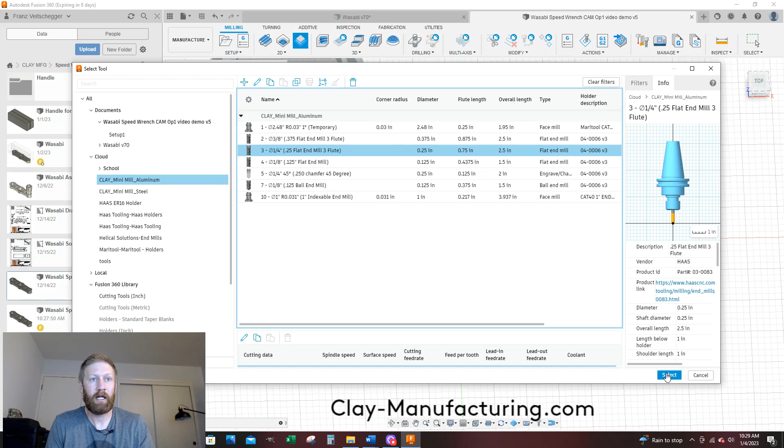We're going to change our tool. We're going to go to our 1/4 inch end mill. So let's go to my clay mini mill. And that is my tool 3, 1/4 inch flat end mill, select. And we are going to reduce this cutting feed rate to a whopping 15 inches a minute. 15, 15, 15. I'm leaving this max at 6,000 RPM.

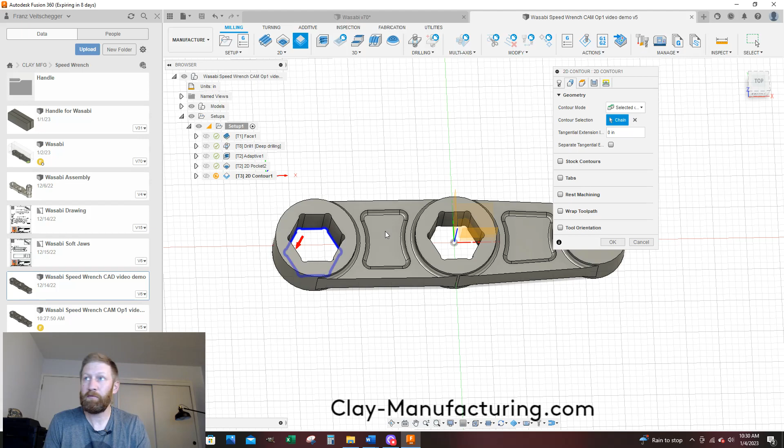And then we're going to have to select that geometry again, so I'm just going to do the same thing. I'm selecting the bottom down here. And heights, it goes to selected contours. I want to shoot past the bottom, so I'm right down here, bottom height. I'm going to say -0.01.

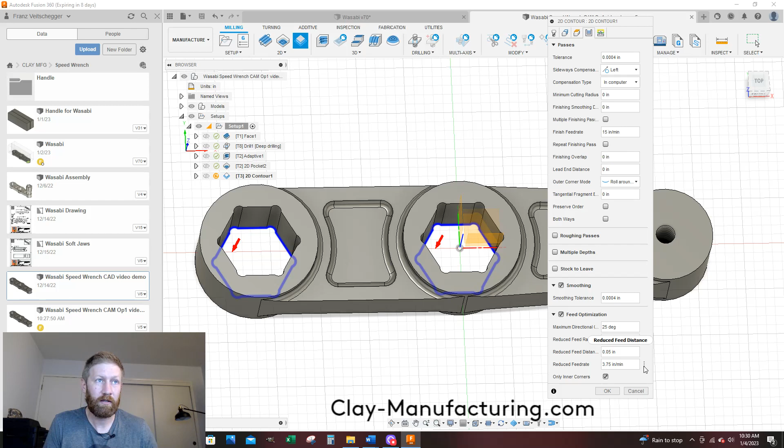And then let's go to passes tab. Probably going to miss something again and have to come back and fix it, story of my life. We'll go to smoothing, and we will also utilize feed optimization. And for this one, we are going to leave that default, it looks like, according to my notes. All right, that's looking okay.

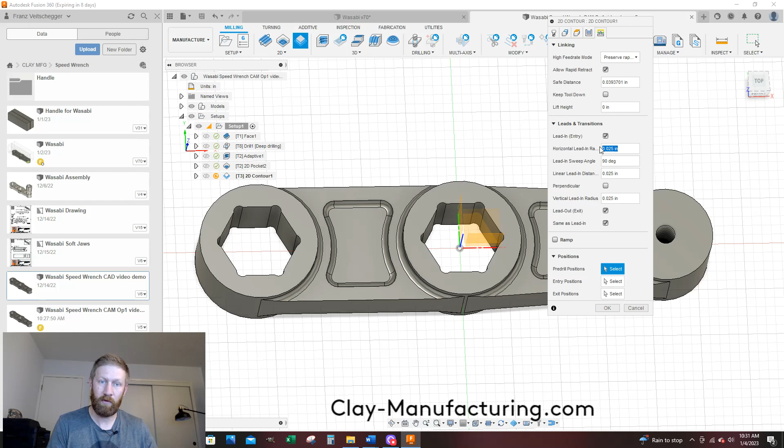And here, let's go to our linking. This is where you can adjust how that tool enters the material. Typically, if you increase the horizontal lead-in radius, it will roll on more gentle and you're less likely to see a witness mark. So we're going to increase that to 50 thou, 0.05, leave that at 90. I don't need a linear lead-in distance, don't care, I'm going to go 0.0. Vertical lead-in radius, don't care, all that material's been removed, so I'm going to go 0.0.

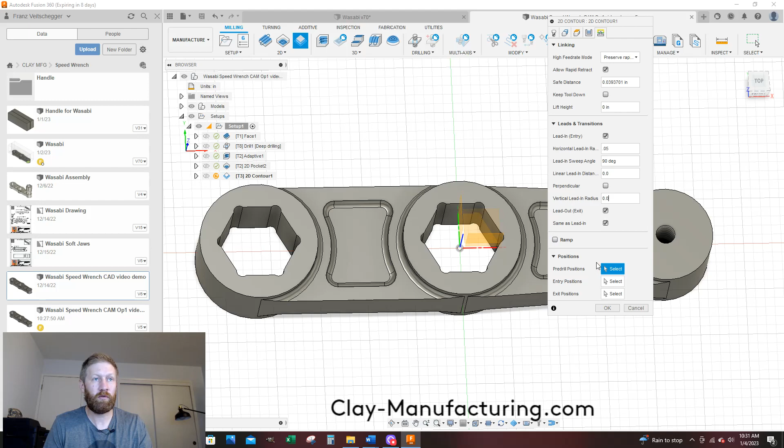And we'll leave all that. And if you wanted to, you could try to pick a place where you want the tool to enter inside here, but I don't care, we're going to say OK. And this little horizontal lead-in radius, that's what we're playing with right there. The tool comes down, walks on the part, cuts around the whole thing, and then rolls off. And now we have that pocket clean, so I'm going to say save.

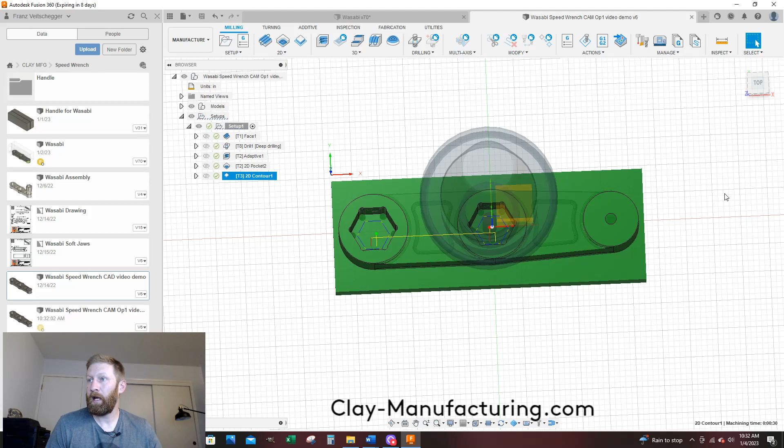We are at the 30-minute mark, so I'm going to go ahead and conclude this as part 1. This is where you should be. And what we still have left is we got to clean out this pocket, we've got to do this blending, we've got to cut that pocket and do the cool toolpaths in there.

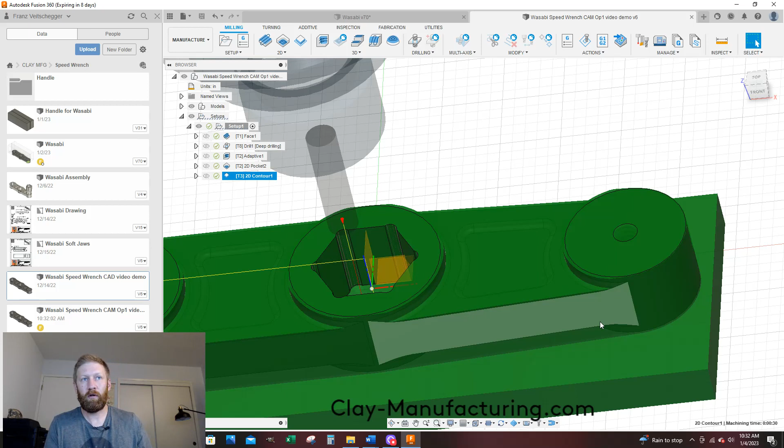And we still, I think my next one up is to do a contour, because when we did that adaptive rough, we left material around the walls of this thing. And the adaptive tooling strategies, they leave a lot of marks, and around a radius it's like a bunch of flats. It doesn't do a nice arc, it goes a bunch of little flats, and it's really noticeable when it's machined. So we need to use a finish contour strategy for that one. So this concludes CAM Op 1 Part 1 of the Wasabi Speed Wrench. I will see you for Part 2.